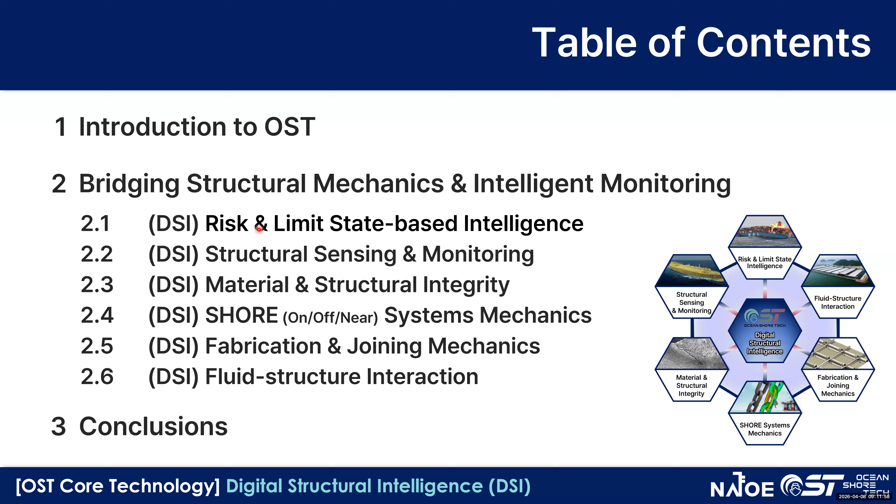This is the overall picture of my presentation. I will briefly introduce our research group, Ocean and Shore Technology, and then the main topic in section two. In total I have six individual topics, but I will briefly introduce them by showing figures and video clips, followed by the conclusions.

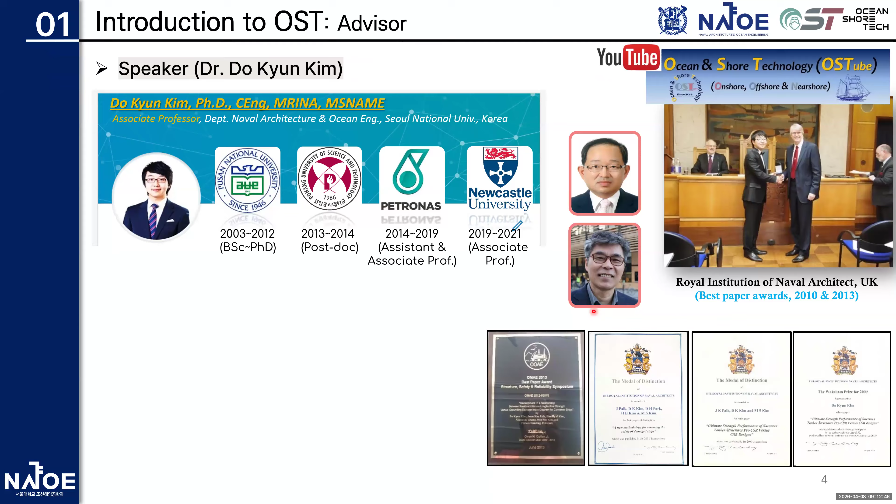Before joining SNU, I was working with Newcastle University and Petronas University of Technology. My background is quite simple and clear. My father was also working with Lloyd's Register, and my supervisor in the field of structural engineering was working with Pusan National University for more than 35 years, and after that he moved to the UK, to UCL London. I will skip over that.

This is our research group, named OST, with two postdocs and many other postgraduate students. In total we have around 15 students. We are willing to produce young, talented researchers by providing creative ideas.

Before joining SNU, I was working overseas for more than 8 years, so most of our collaborators are still staying overseas.

Main topic: bridging structural mechanics and intelligent monitoring. Since 2014, I have established OST. At that time the name was Ocean and Ship Technology, and now we have slightly changed the name.

We target ocean and shore structures, which can be split into three categories: offshore, onshore, and nearshore structures and techniques. Basically, we focus on digital structural intelligence techniques, split into six individual research topics. Mainly I focus on limit state design, including ultimate limit, fatigue limit, accidental limit, serviceability limit, and risk assessment.

Since I came back to Korea, I am focusing on structural sensing and monitoring. This is one of the important topics for digital intelligence.

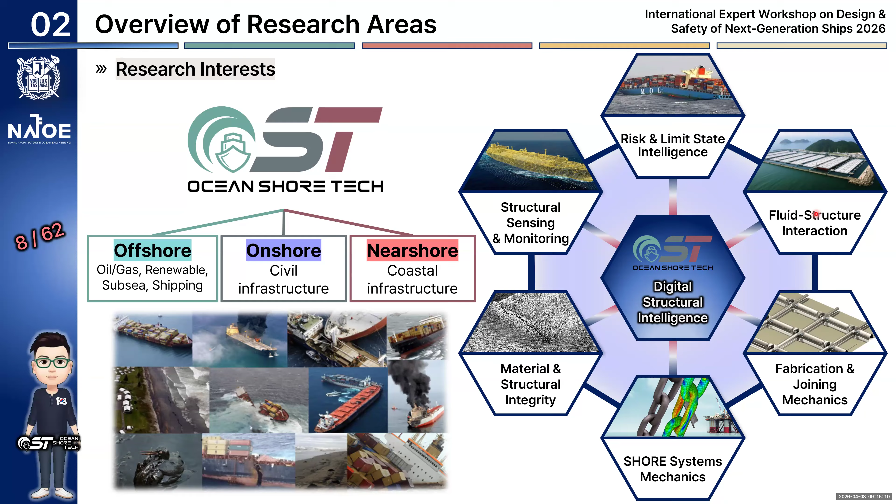We focus very much on the structure side, but at the same time fluid structure interaction will be a main topic. It's just like a paradigm shift. Traditionally the approach was through physics governing equations and resource intensive approaches, with isolated domain analysis and high fidelity simulations required, but it was quite slow.

Higher computational cost is required, and conservative rule-based design is nowadays adopted—it's just like allowable stress design and working stress design.

But at the same time, we can target our future AI-driven vision and future directions. It's just like intelligent mechanics—real-time insight might be required.

So the process is moving toward data and physics informed learning or training, and multi-physics surrogate modeling is required. And at every single moment we can measure from the sensor, an integrated real-time monitoring system could be established, and the design can be optimized as well.

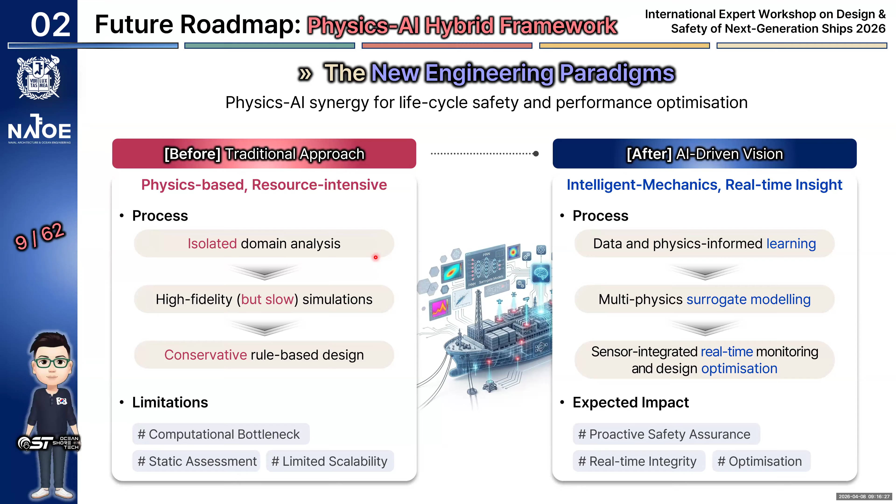So I will introduce five or six simple examples. The first one is the limit state-based structural safety assessment, related to ultimate strength. As you can see here, there are still so many accidents happening, especially which could be split into two categories: the vessels or the ship structures.

We still need direct safety margin evaluations, but the gap is also there - over-reliance on idealized assumptions in historical studies and historical datasets, and oversimplification of complex variables in real-world shipbuilding.

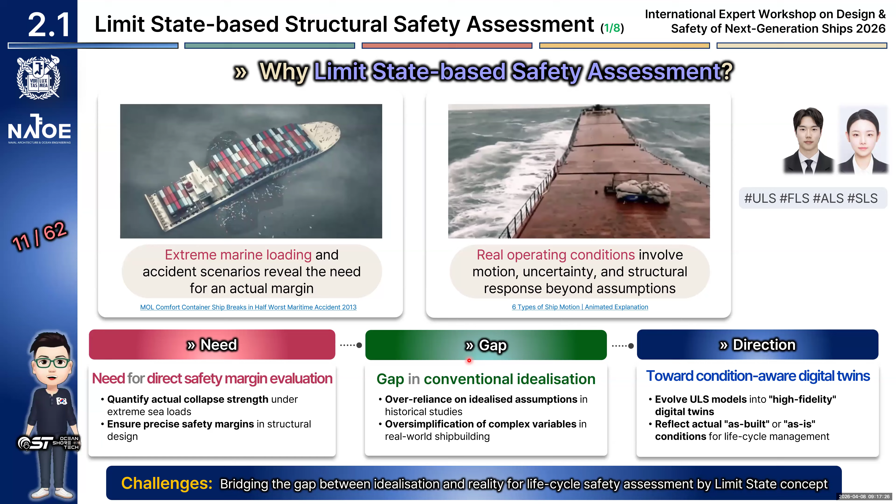So we think we would like to evolve ultimate limit state models into high fidelity digital twins. Of course, it might take some time and the techniques should be improved as well. So we want to reflect the actual as-built or as-is condition for life cycle assessment.

So let's take a look at our research objectives. We want to develop advanced ultimate limit state assessment formulas, like design formulas or empirical formulas, so we can address the simplified unstiffened panel, curved or flat, and the stiffened panel, the hopper, or many other shapes, wind turbines, and hull girders.

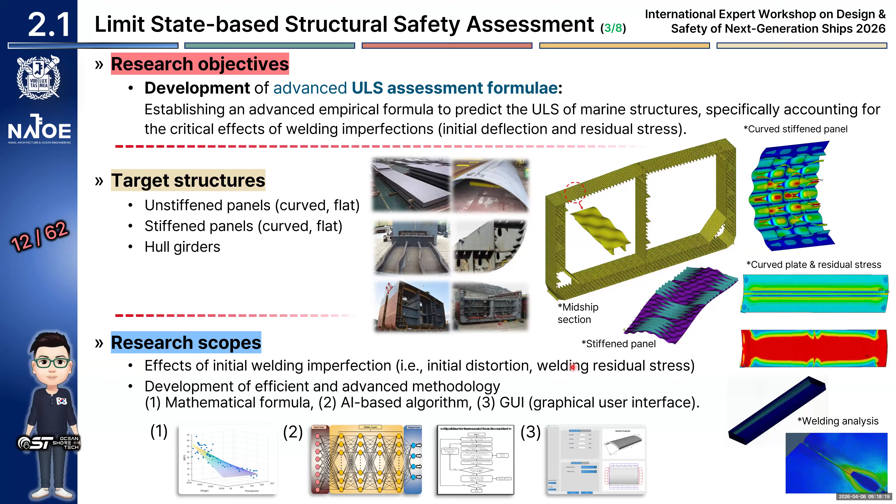Nonlinear structural mechanics are adopted for the analysis, including welding effects, etc. And the scope will include mathematical formula and AI-based algorithm development, and a GUI for working with major shipyards. This is one simple example for the curved plate.

Recently we investigated ULS assessment framework development, targeting minimizing the gap between numerical simulation results and predicted values. And of course, applicability might be important as well.

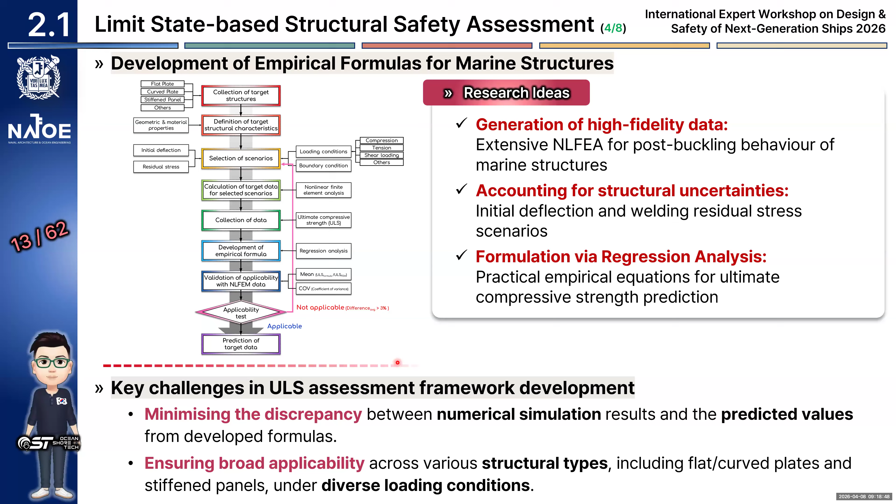So the hull girder we split into the hold model, the stiffened panel, and the plate. We adopted more than 2,800 validated nonlinear finite element model cases, and established our own design formulas.

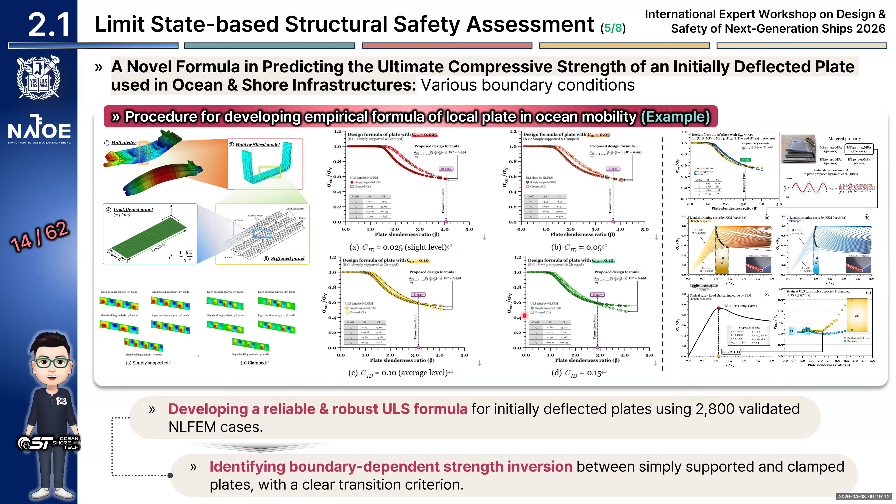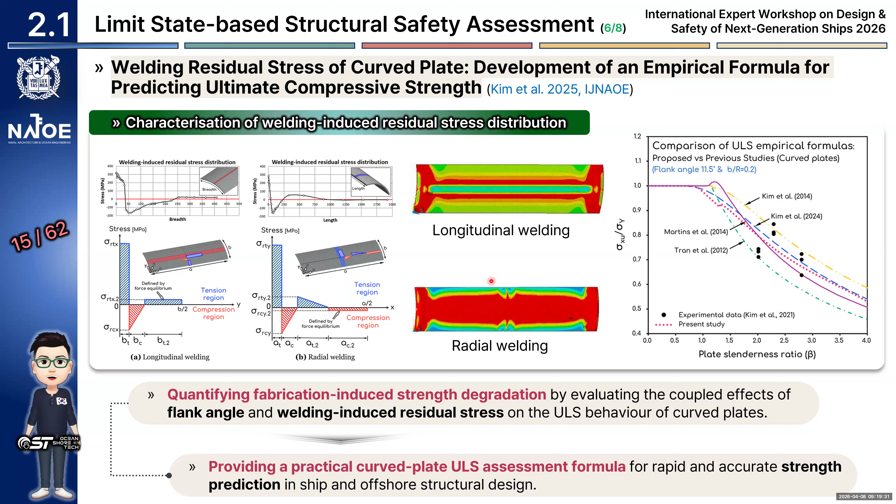We also checked the boundary effect. And welding is one of the important phenomena, especially for shipyard and shipbuilding engineers, so we also developed our own welding residual stress distribution equations and prediction techniques.

And of course, this is ongoing work and future work. Physics-embedded learning might be important for us, incorporating the thermal and mechanical governing equations into the artificial intelligence loss functions.

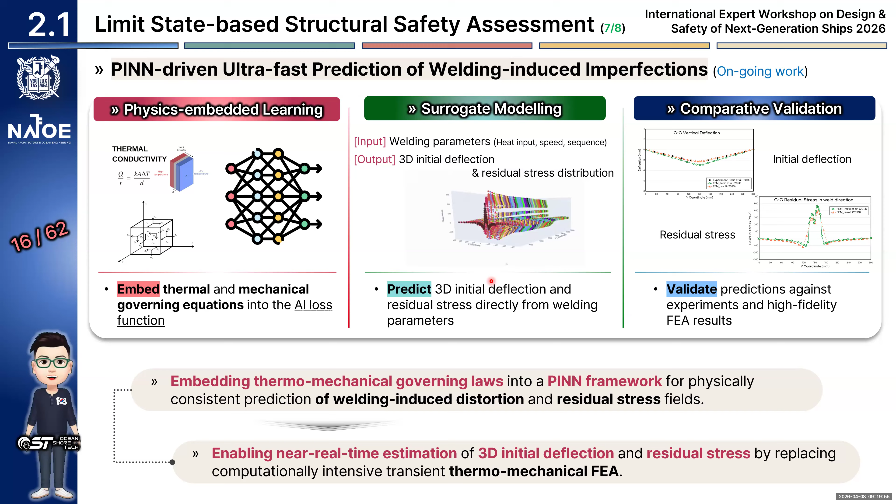We want to develop a surrogate model, and comparative validation has been done. At the same time, for future work we are also working on AI agent development, ontology matters, and original datasets - how we could handle all those things: environment, subject, and actions.

So we will explore design generatively, and optimize the multi-objective trade-off - that is just like the optimization methods.

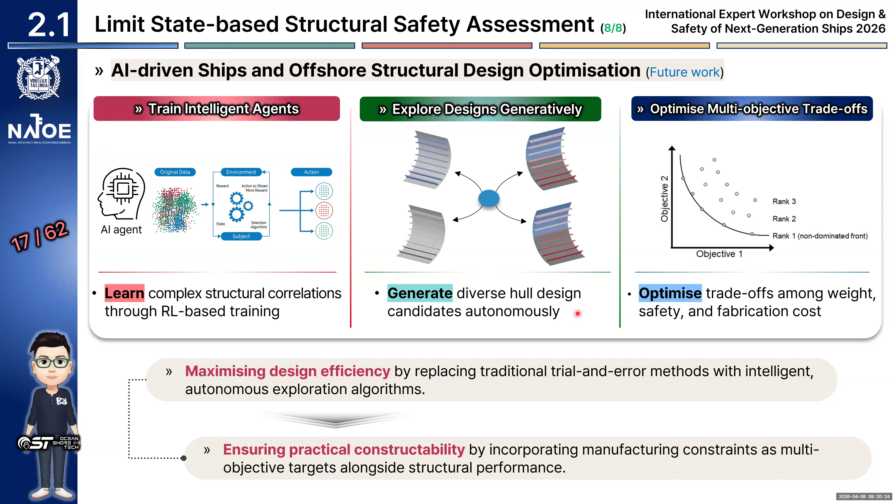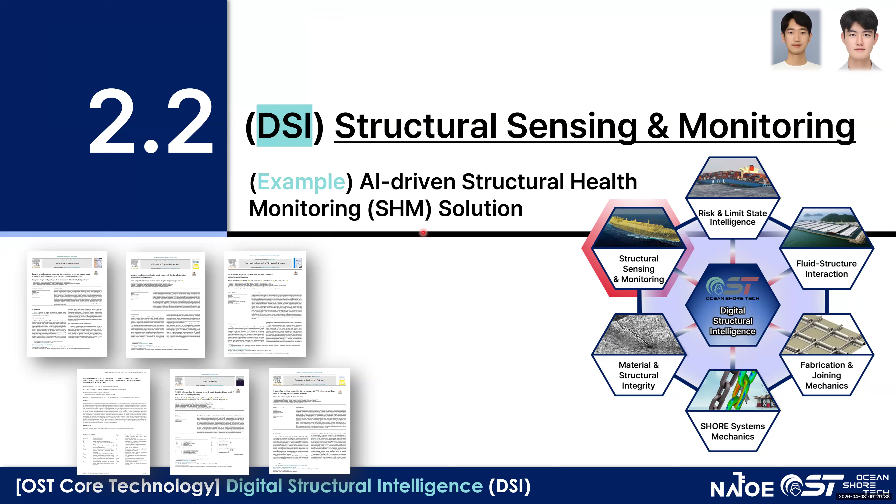The second one is sensing and monitoring - we call it real-time structural health monitoring. We still need realistic structural assessment, and the gap is that conventional structural health monitoring is just like every 5 or 30 minutes.

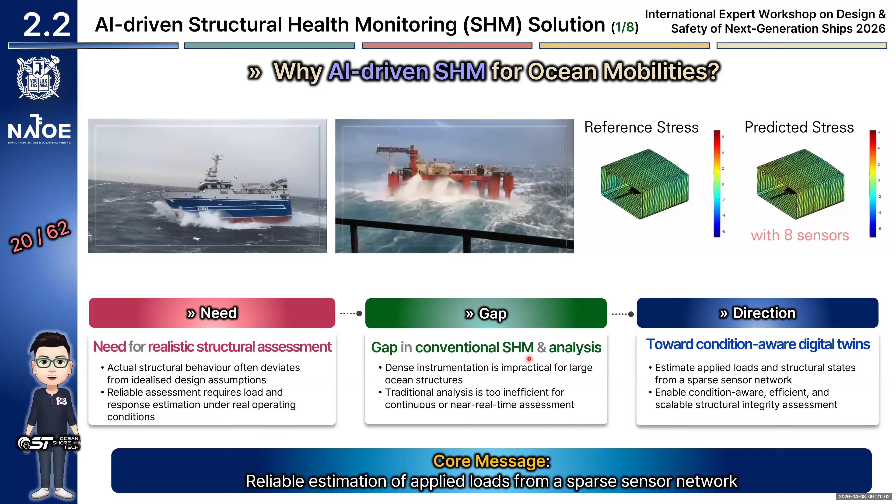The gap is there, and the direction is real-time - how we could measure real-time structural safety by adopting digital twin techniques. So the target is quite simple: ship structure, offshore, and many others.

So we developed our own conversion model for the real-time hull response reconstruction framework. It's always challenging to place sensors, more than 100 or 1,000, on a real ship, which means we have limited measurement datasets, so we established the conversion model.

So how we could utilize this limited number of sensors, how we select the sensor locations and mode, replacing repeated numerical simulations. Of course, measurement reliability is also a key issue.

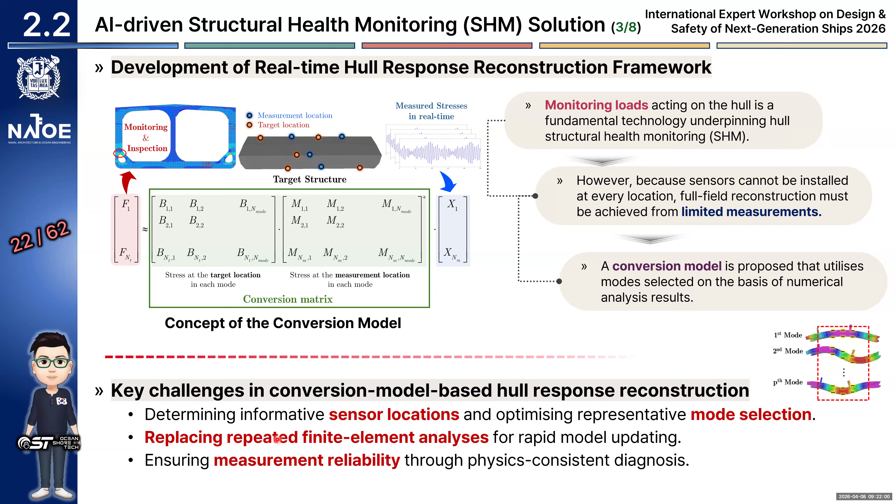So three techniques - PCA, the first mode determination, which we are aware is pretty much important for us. Also, Bayesian optimization for mode selection technique is adopted, and stress RAO-based determination technique. All those things are combined together.

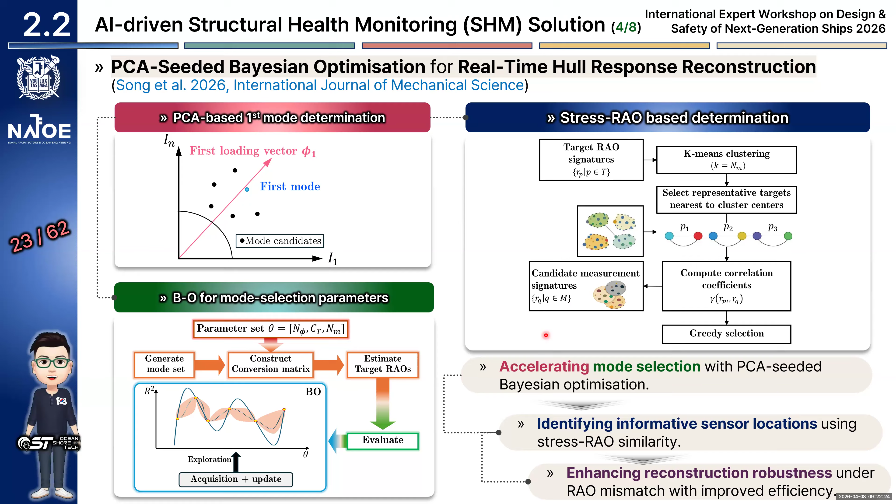And we checked the accuracy. It was not perfect, but much better than before.

And in the future, this is another example for the plate. Normally it is hard to measure the real-time displacement and the corrosion or material failure, especially in the offshore field or the MRO business field.

So we are also working on vision-based sensing using drones, and applying physics-informed AI models, and field measurement data integration might be needed.

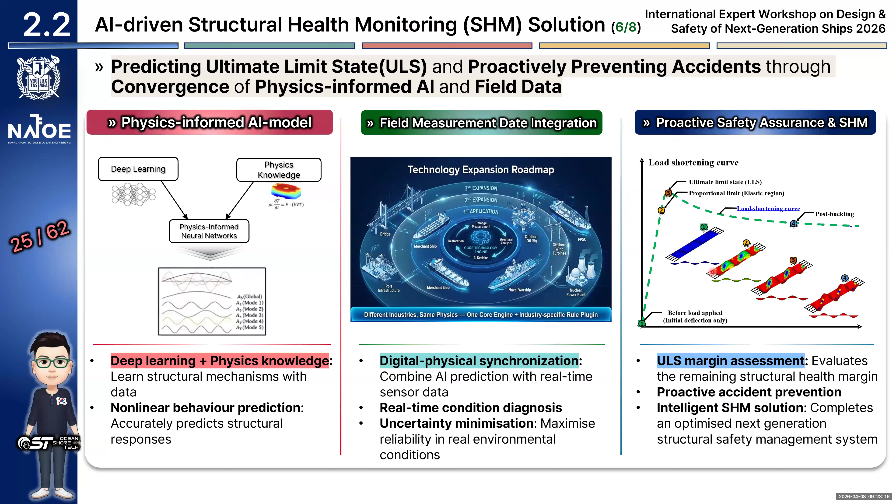This is one example. We will extract the data from the real field, and at the same time evaluate our structural conditions by extracting the von Mises stress view, shear stress, XY, Z displacement, and strain energy.

We can visualize it and train it, for example using the CNN technique. And the FNO-based framework is actually being developed now.

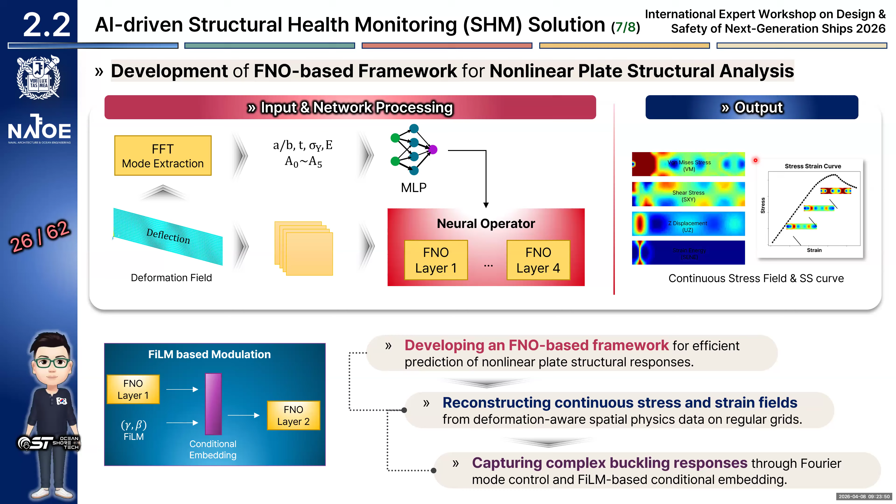This is the publication record, and it might take some time to publish additional papers. In the material part, we are here, and fatigue and fracture is always a big topic.

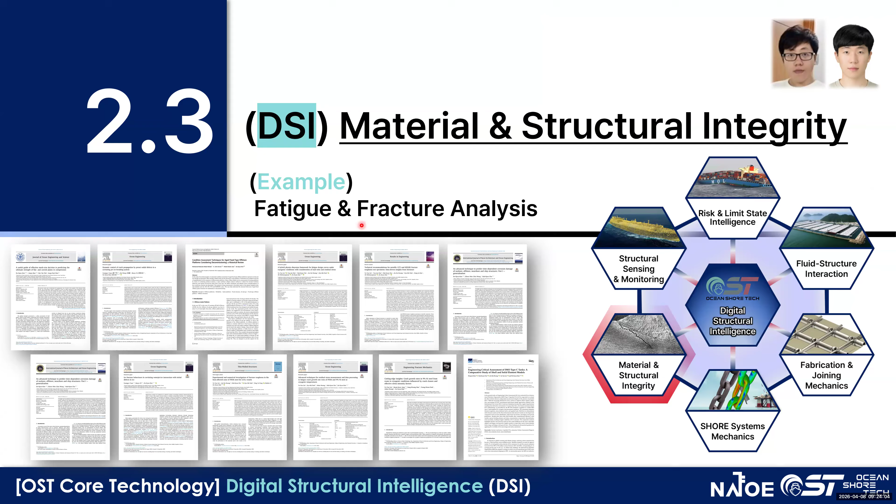But the fatigue and fracture is governed by multi-physics degradation, aging issues, and flaw size and fracture, which must be explicitly considered.

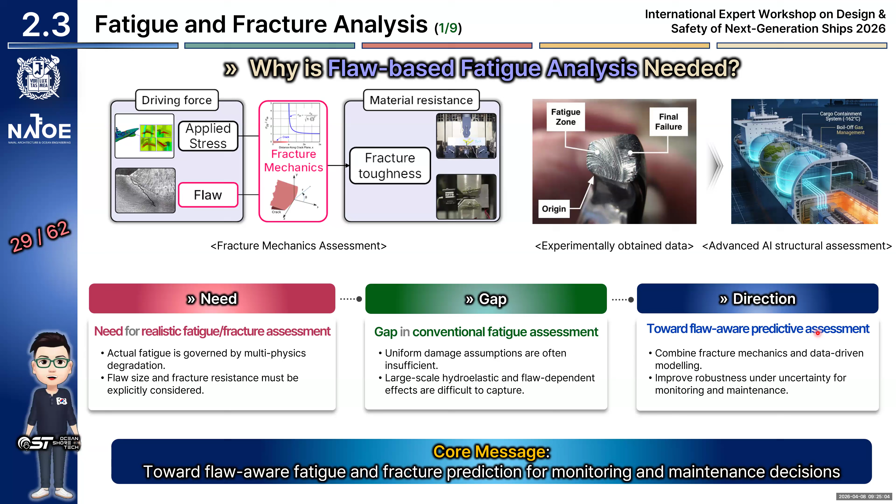So there might be a gap, and the uniform damage assumption is not always sufficient. Large-scale hydroelastic and flaw-dependent effects might be difficult to capture, so the future way is combining with AI technique.

Tomorrow I will go down to the government office to present the liquefied CO2, IMO Type C tank development and heat treatment techniques.

At the same time, I would like to very much appreciate the great support from the Lloyd's Register Foundation for my work. We equipped fatigue crack growth testing facilities, and corrosion is also one of my research topics.

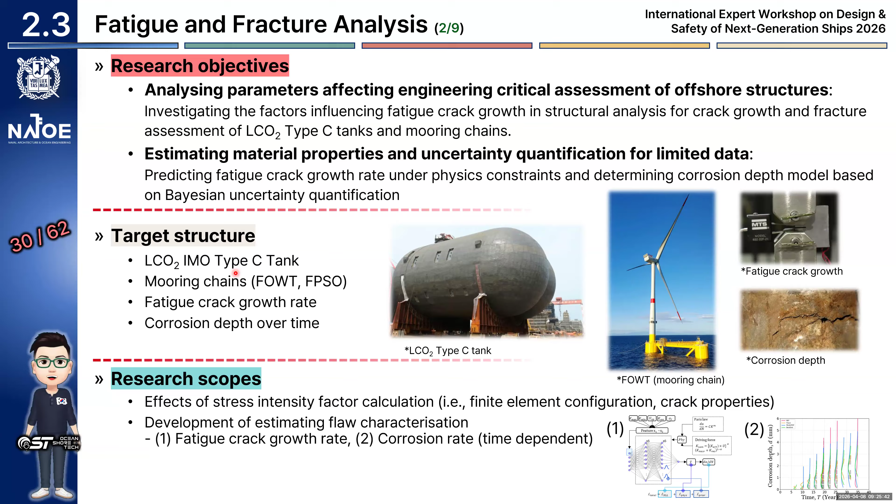So we equipped the experimental facilities and obtained the data set, and established the physical model.

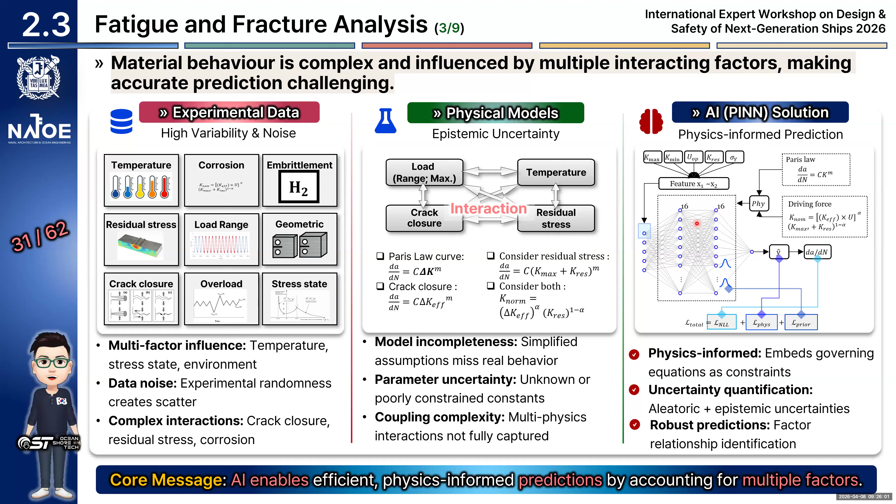This is just like the physics and AI physics-informed neural network we developed by our own. The future work might be needed because...

We still have a limited number of data sets, so how we could be able to interpolate or extrapolate and predict future data sets.

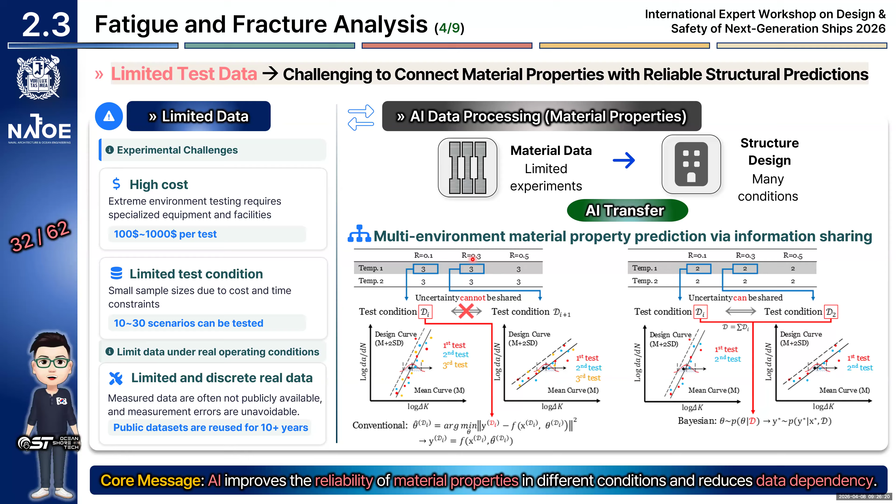This is related to the corrosion side. Nowadays, Bayesian corrosion depth analysis is one of the popular techniques.

Based on physically measured corrosion data, we would like to establish what we call the time-dependent corrosion wastage model, so that we can combine it with the structural part and material, corrosion, and crack analysis.

The core message is that artificial intelligence may provide an effective framework for integrating the physics model when addressing problems involving discrete data.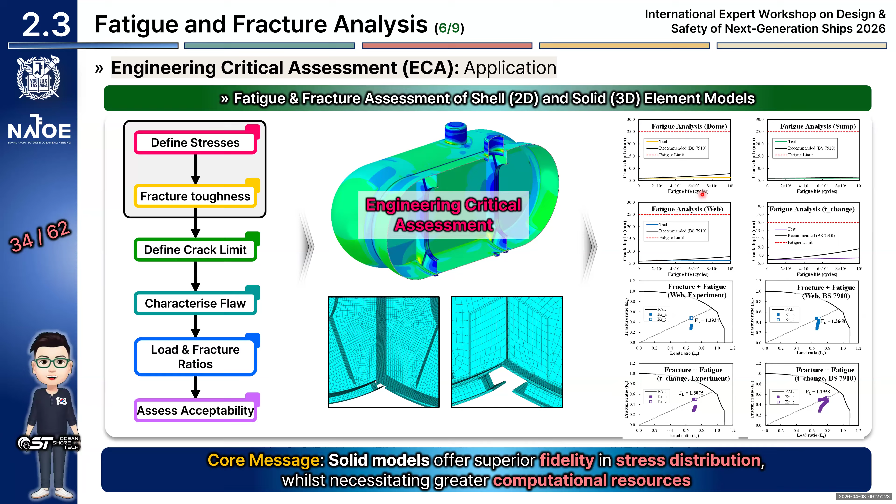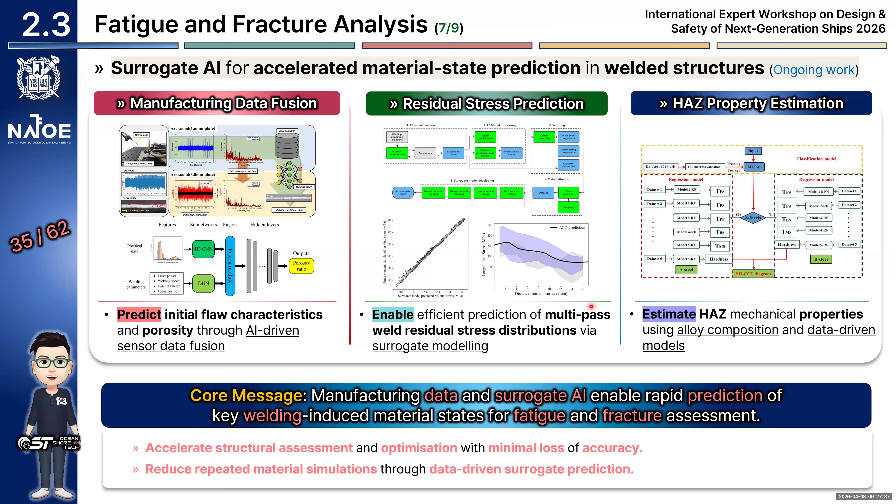An example of ECA, engineering critical assessment, and this is ongoing work applying AI techniques, especially for the HAZ, the heat-affected zone, and many others.

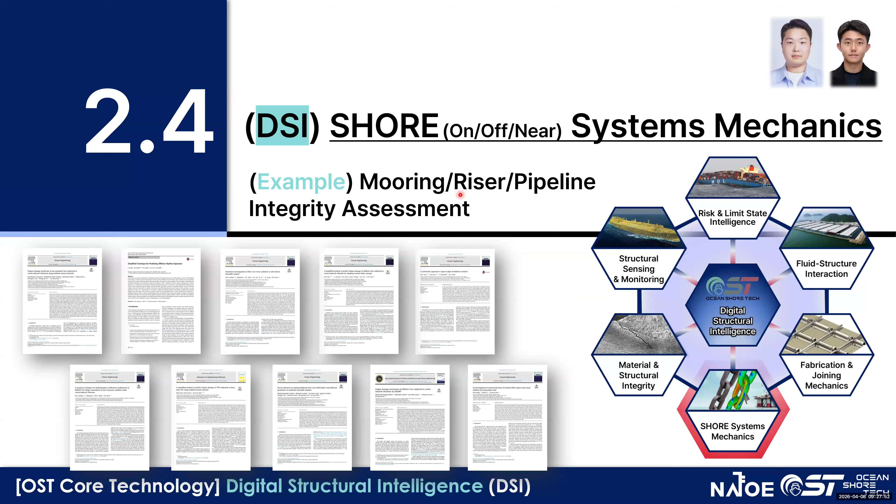The crack propagation simulation takes a very long time to simulate, and this is the publication record. This is the line dynamics.

I'm also working on mooring or riser systems connected with chains. People may think the chain mainly covers tension, but at the same time it is subjected to OPB, IOPB, and IPB - out-of-plane and in-plane bending matters. So all loads are subjected to the mooring chain, meaning combined load must be considered.

Fatigue should also be clearly considered. At the same time, the limit state is important, subjected to repeated load, so progressive plastic deformation should also be focused on.

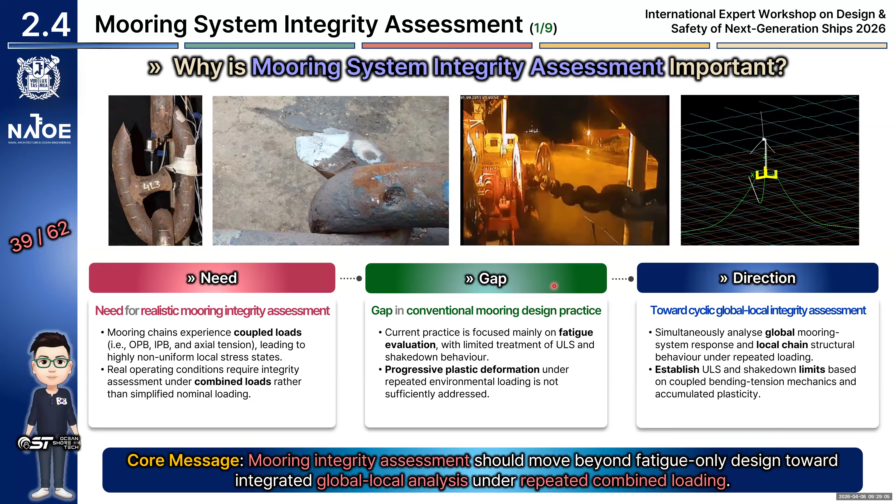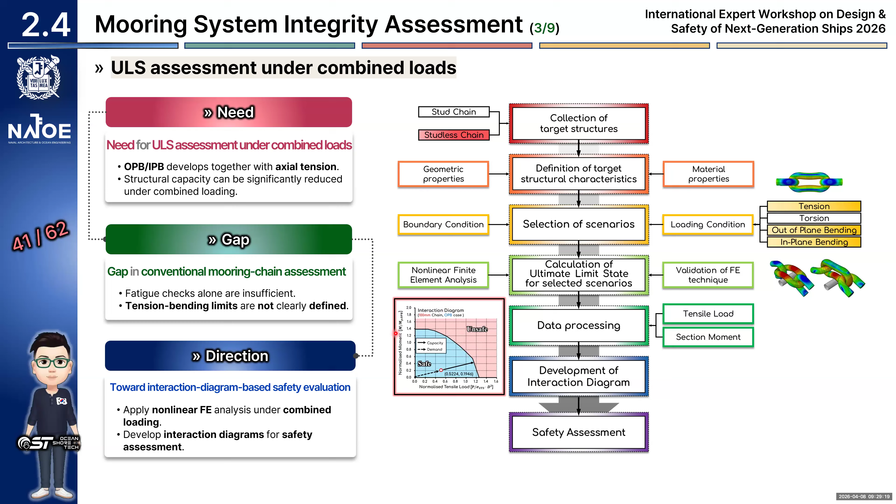Over the last two or three years we investigated chain methods, and this is the brief procedure. We would like to produce the safety evaluation diagrams.

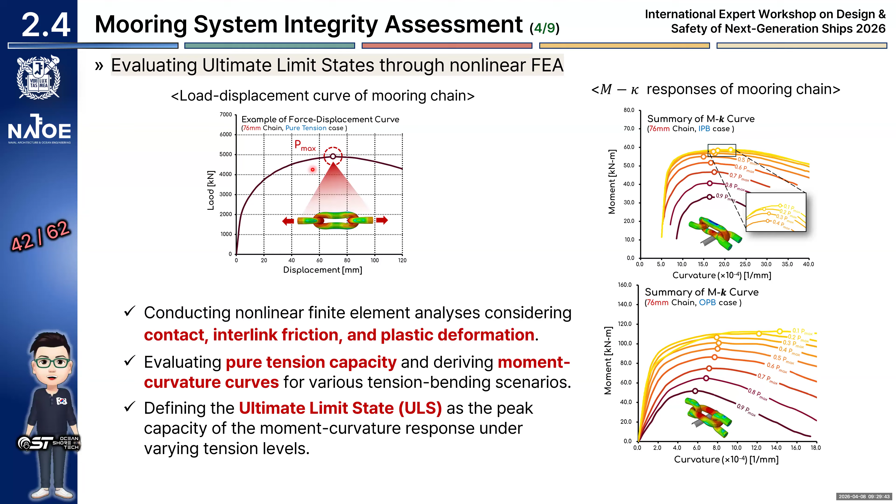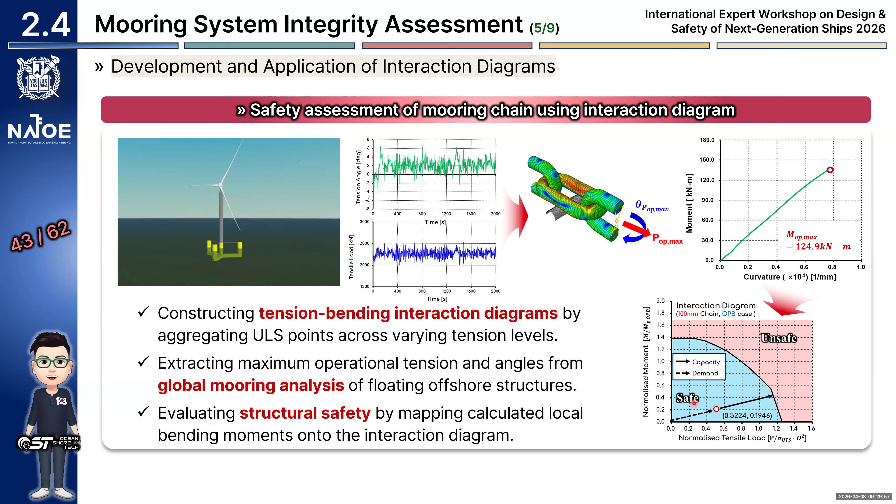Every single analysis we conducted by the nonlinear finite element analysis, and the displacement and the load type can be selected, like pure tension, IPB tension, and OPB, combining all those things. We try to extract the maximum values, and then establish this kind of diagram. From the real-time simulation data set, we extract the tension and bending capacity, then we can plot it and measure the safety. This is just like the real-time safety assessment.

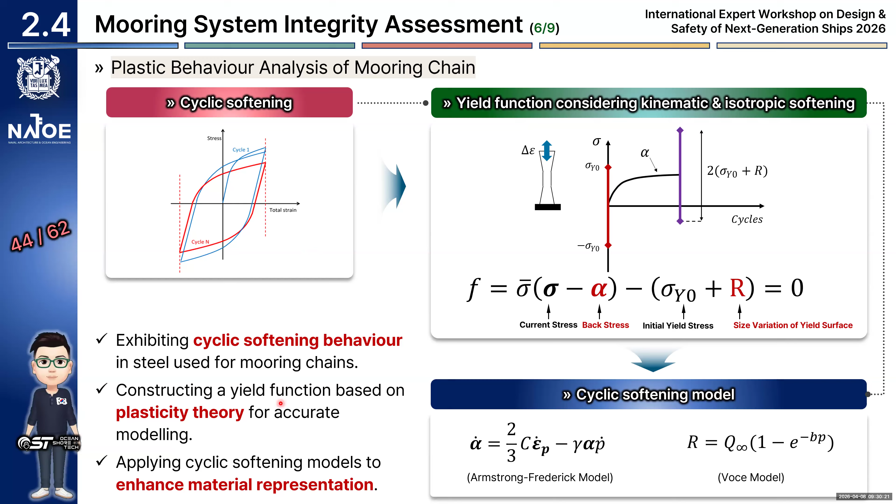Also on the material side, repeated load may degrade the material, so cyclic softening should also be considered, along with the yield function. These are the existing models, and we try to combine all those things in the local analysis. So for plastic response, we have the elastic shakedown, plastic shakedown, and ratchet behavior. We are now establishing this kind of diagram as well.

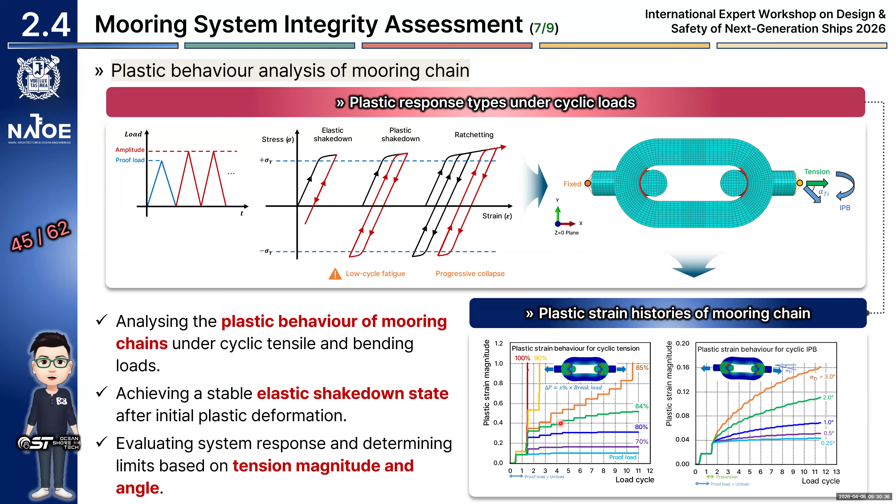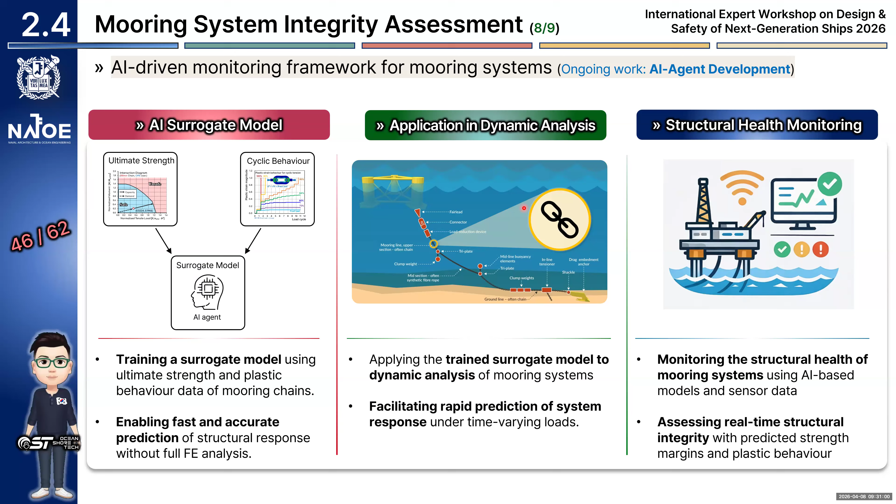In the future, AI agent development is going to be the focus. We have now established ultimate strength and cyclic behavior here. We are working on a surrogate model by developing the AI agent and dynamic analysis. AI development for energy, electricity, and the cable line is also important.

Sheet forming is also one of the topics, especially this comes from GTT, and they have their own copyright. So we are willing to follow up on how to form the first barrier. The thickness is just 1.2 millimeters, but still you can see here we have residual stresses and a thinning effect.

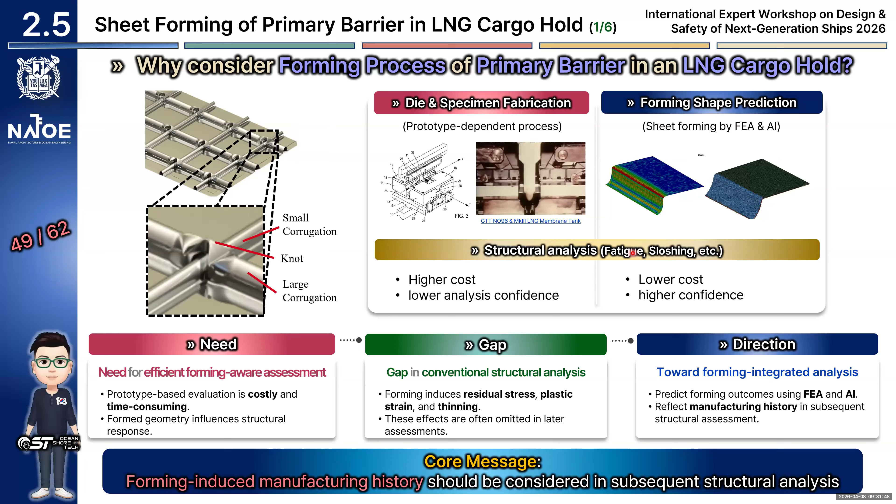For the structural analysis, from pressure like sloshing and actual compression, shear, whatever it is, we want to investigate more detailed structural behavior. So this is the procedure, and we want to follow up on the punching, the blank holder, workpiece, and the die, using LS-Dyna. We are now working on that, and here is a simulation outcome, a very simple one.

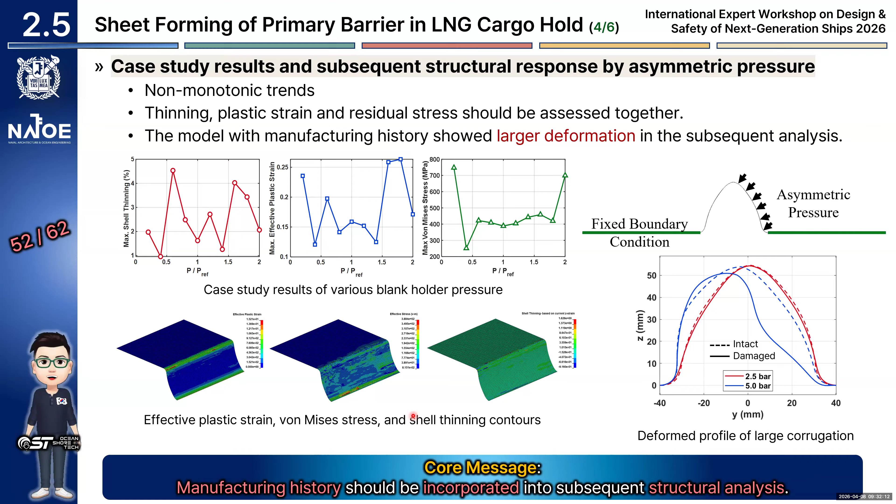We found out that the manufacturing history shall be incorporated into the subsequent structural analysis. This comes from other research outcomes, and AI application will also be a focus.

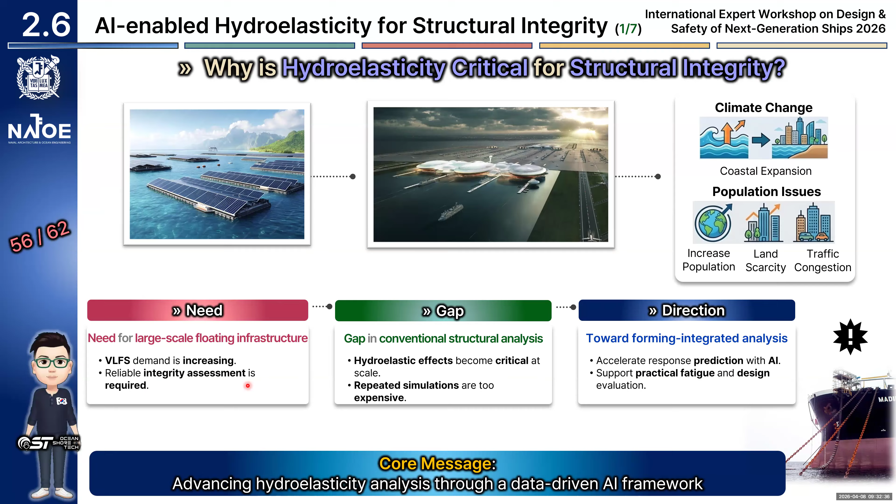The last one is AI-based hydroelasticity. As you can see here, very, very large floating structures - that demand is also rapidly increasing, and integrity assessment is also required. So hydroelastic effect and a data-driven framework is needed, and computational efficiency might be the issue.

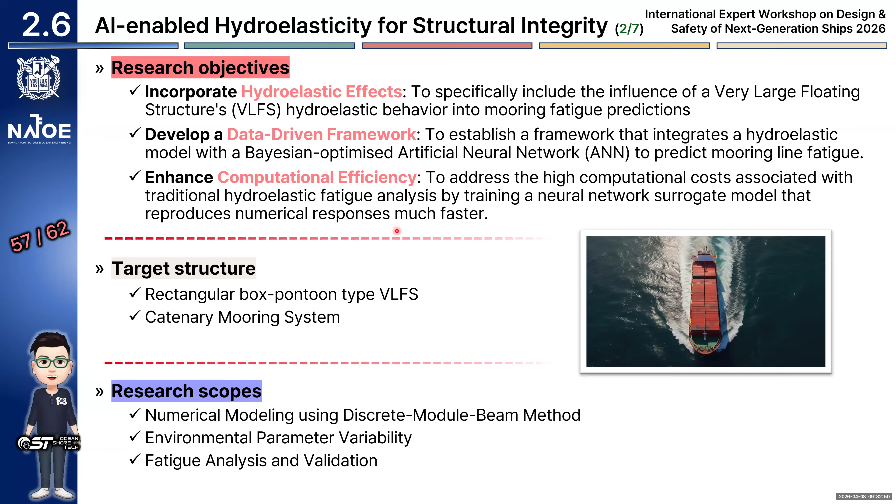So we developed a discrete-module-beam method, collaborated with Texas A&M and Florida Tech in the United States, for physical data generation using this method, and we adopt the artificial neural network for machine learning implementation. At the same time, we want to see the fatigue life calculation and validation as well.

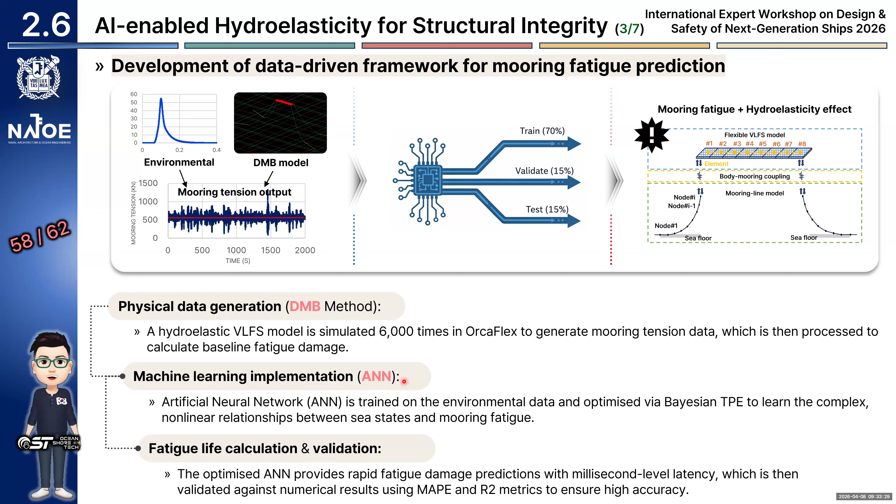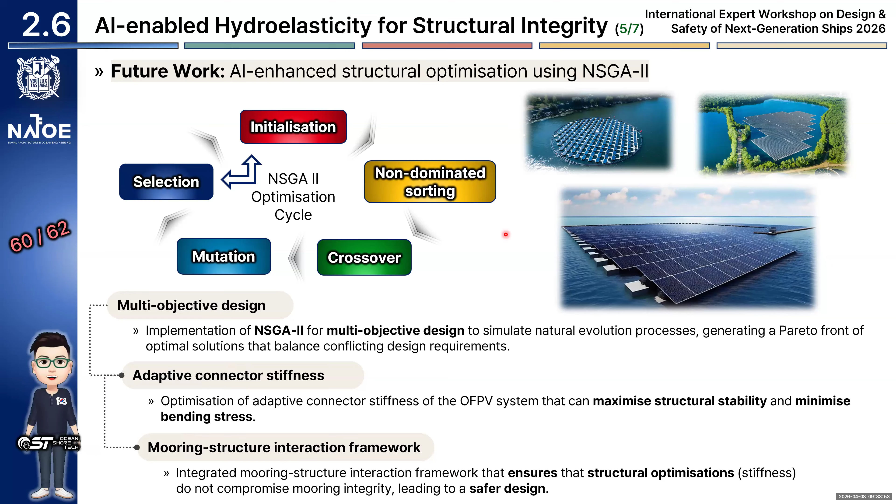So there are still many things to do. These are the twin applications. This is almost the last slide, and I've elaborated on more than six individual topics.

We have limited time, please bear with me. The summary might be here: we want to focus very much on digital structural intelligence, which we named DSI. That is our core direction for advancing structural safety, integrity, and decision making by providing an AI agent system for ocean and shore infrastructures, along with physics-based mechanics and conventional engineering methods.

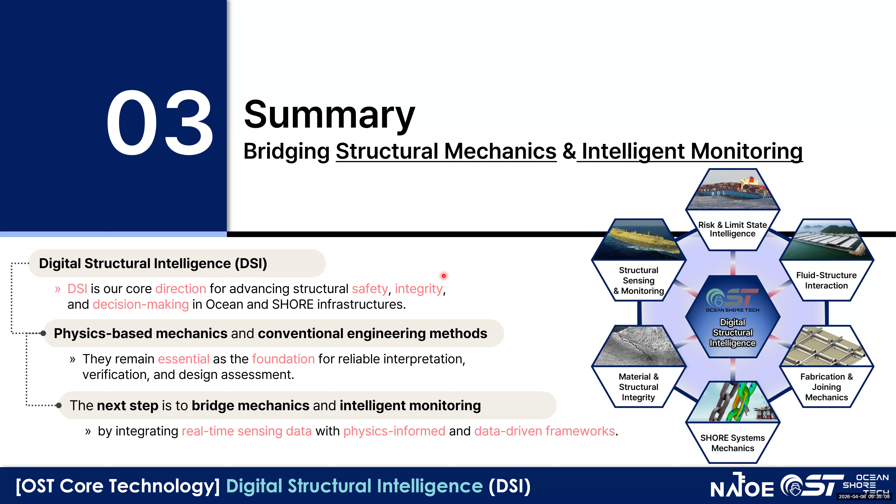These remain essential, of course - very important as the foundation for reliable interpretation, verification, validation, and design assessment. The way forward is bridging mechanics and intelligence modeling and monitoring. We would like to integrate real-time sensing data, and of course the noise and everything should be adjusted with the physics-informed and data-driven framework.